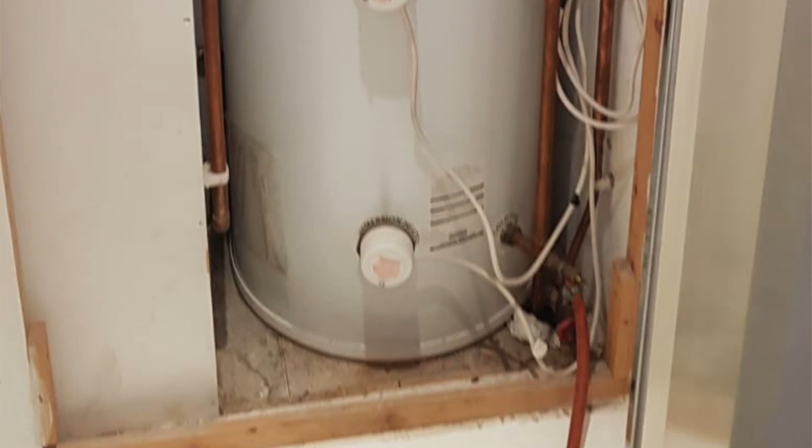Now this is an unvented cylinder, and this is where the white expansion vessel goes, so the potable water one. But this Heatrae Sadia one, this Megaflo, doesn't have one because it has an internal bubble.

So what's basically inside here is like a big wagon wheel, which is connected to the hot water out pipe, which comes down to near where the temperature pressure relief valve is. So because they take the water from down here, it gives a buffer here, and this big wagon wheel goes up and down as the water expands.

So this has an internal expansion vessel. There's another manufacturer that does kind of the same thing for their cylinders. So this doesn't need an expansion vessel on the outside, which is normally connected on either the combination valve here or actually in the cold water supply pipe down into the bottom of the cylinder. That's where the expansion vessel would normally go on here. So that's an unvented cylinder that doesn't require an expansion vessel because it has one built in.

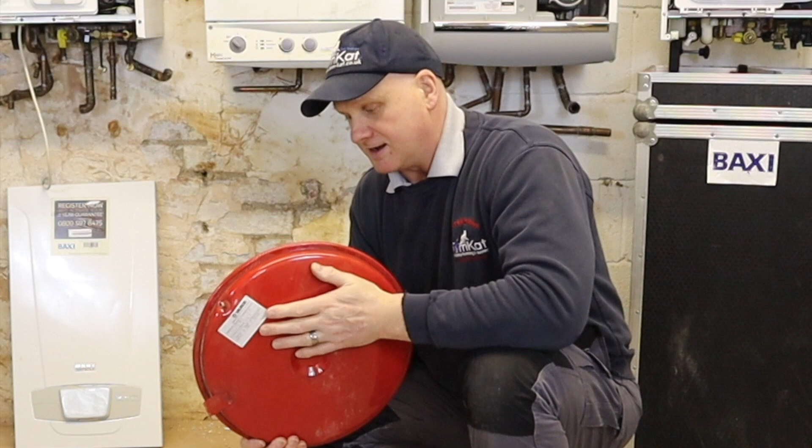Now we've got two different types of expansion vessels here, like I've just been saying. This is a central heating one, which we're going to be cutting up, and this is the hot water one. So I'm going to cut the central heating one up because, as you already know now, the diaphragm is held in with this section here. So this side is the air side and this is the water side. So what I'm going to do is cut a section out of here so we can see what's inside there.

So I've got my angle grinder and I need to put my PPE on. First of all, let's get my specs on. And then I can put my ear defenders on. And I can start shouting again. So, here goes. Remember, when you're using something like this, always follow the safety precautions from the manufacturer. I am actually using a steel cutting blade here, and always remember your PPE.

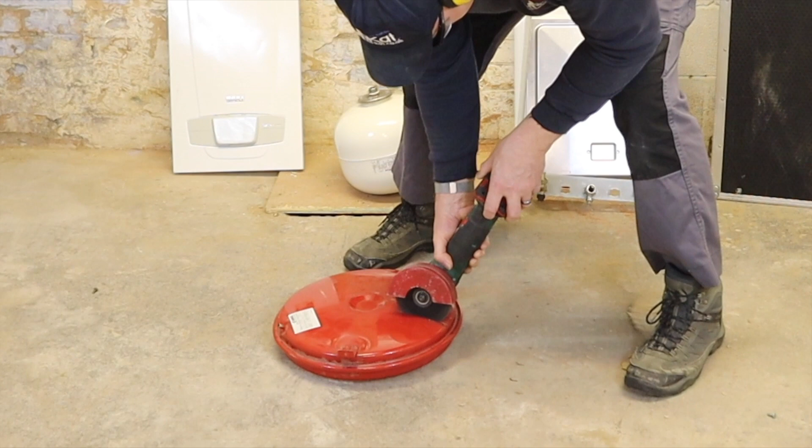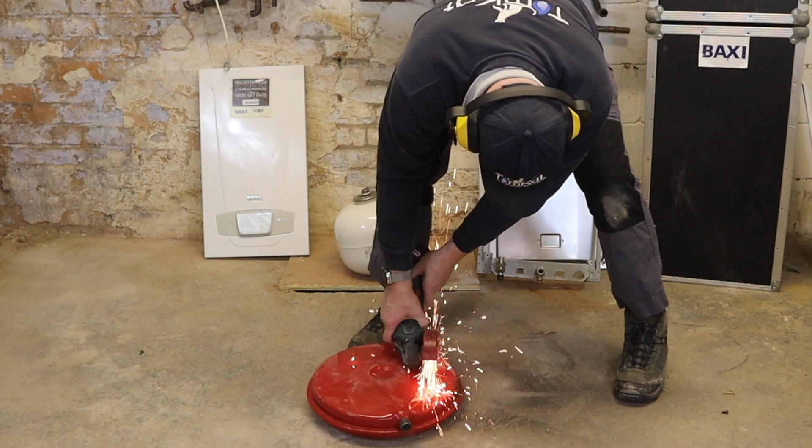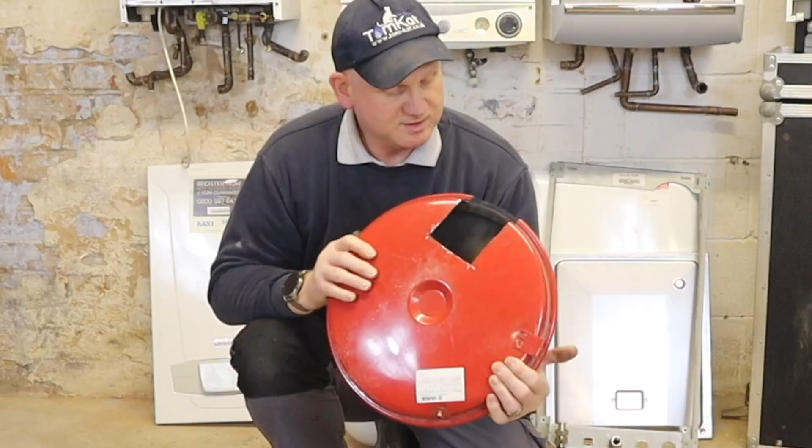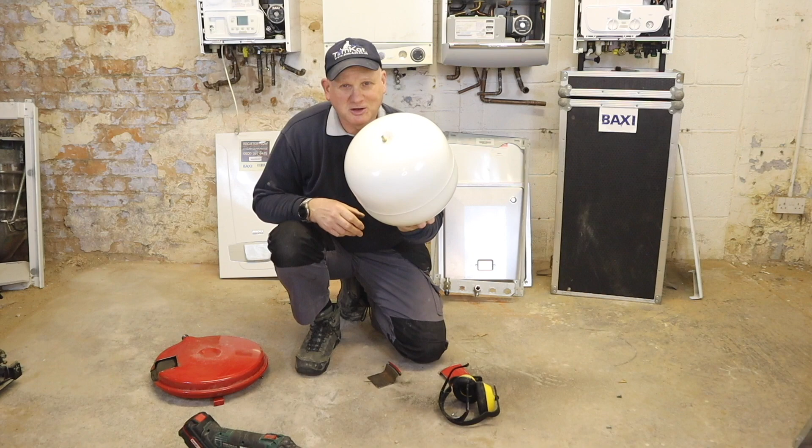That's one side cut. Just need to do the same on the other. Now I can see inside this diaphragm. So that's that one cut open. Let's give this one a go. So I've made a little frame, hopefully it's going to stop it spinning. We'll see.

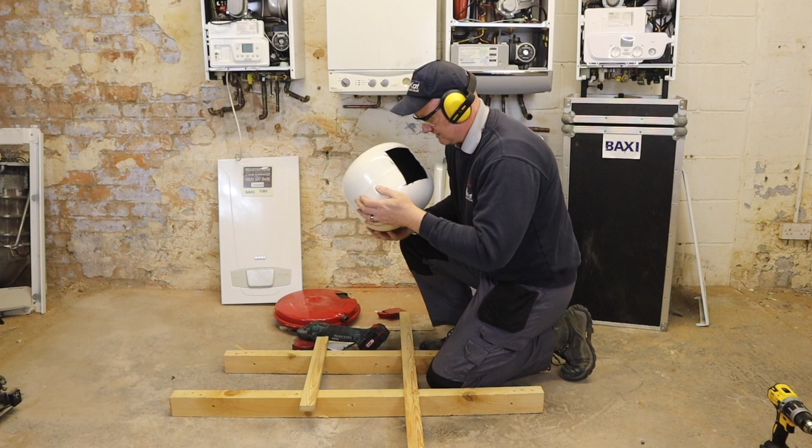That were easy. So now you can see the diaphragm is actually in the bag, like we say, inside there. Let's have a closer look then.

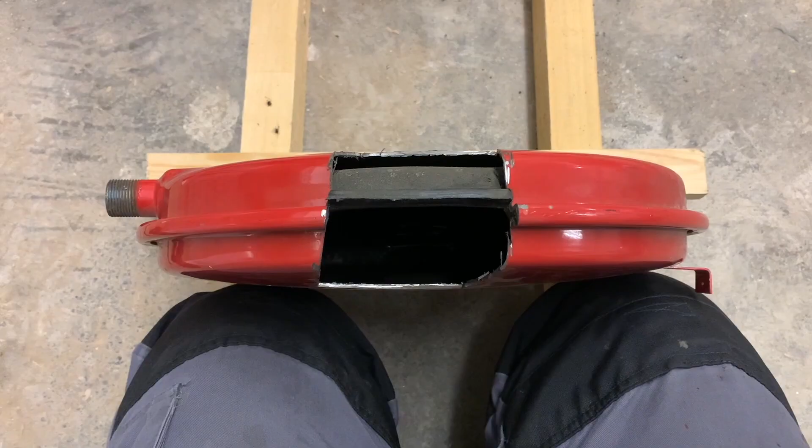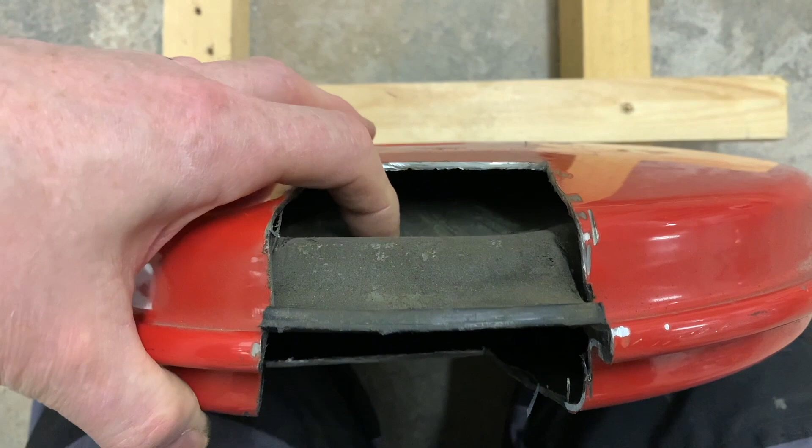Now let's have a look at the central heating one first. So we can see here, this is where the central heating water comes in. And on this back side of the diaphragm here, this is where the water would expand and push against the diaphragm, which would then compress the air, or the nitrogen, on the other side. And if you look closely, can you see that down there? There's actually water in the air side of this expansion vessel. That's why it's here - it actually didn't work. So that's the water side and that's the air side, and you can see that's what the diaphragm would be doing, because you can compress the air but not the water. So that's the central heating one.

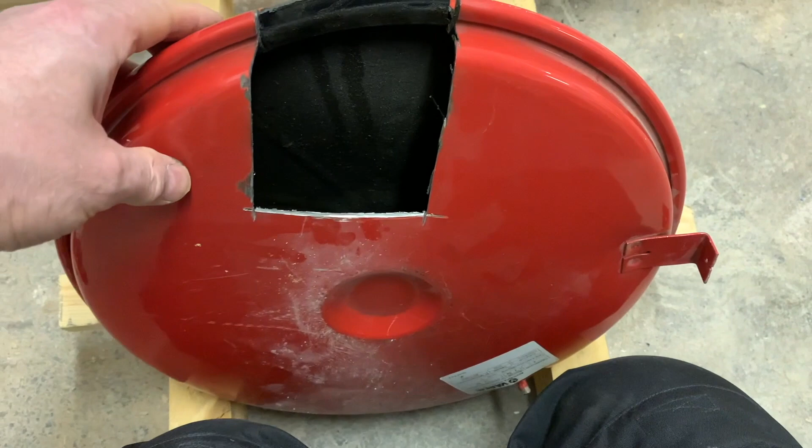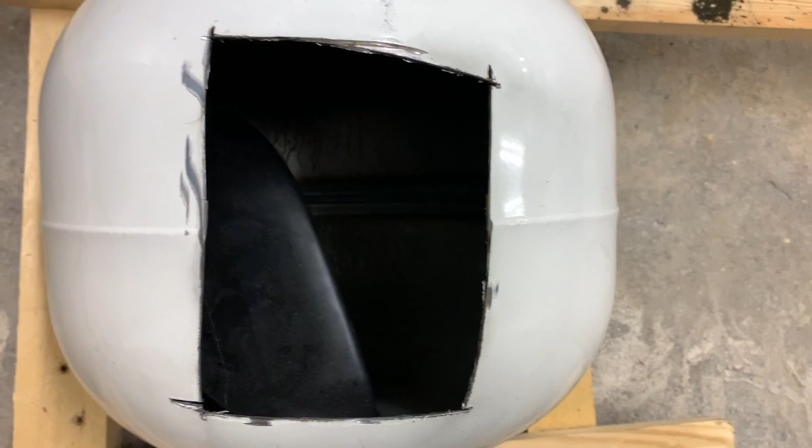Now let's have a look at the potable water expansion vessel. So again, this is where the potable water would go in, so fluid category 1 water would go in there and it would go into the bag. So all the other space around it is taken up by the air, so you can see the Schrader valve there. So you can see the bag keeps the potable water completely separated from the steel vessel. So that's what you'd find inside this potable water expansion vessel.

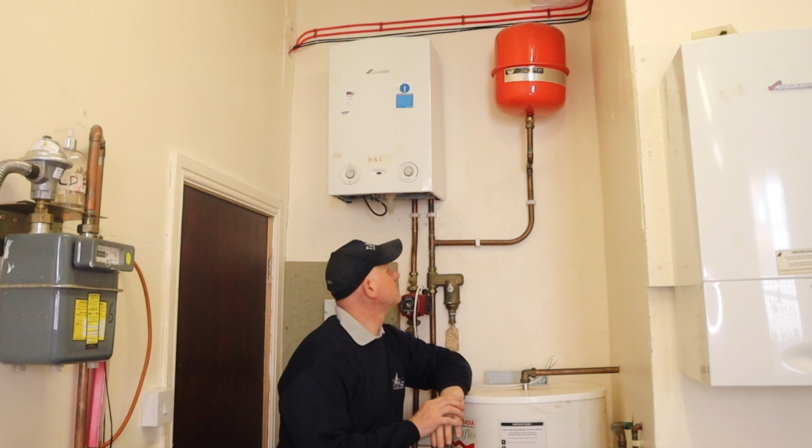So as you can see here, not all the central heating expansion vessels are like big discs. They can also be kind of ball shaped. And this is an external expansion vessel going to a heat only boiler. As you can see, the connection here is on the return, as close as we can to the actual boiler. So if you do have to put a remote expansion vessel on, it should go on the return as close as you can to the boiler.

And the reason why we put it onto the return is so we don't get the excessive heat which we would on the flow. So we would be getting a lot cooler water coming back, which would prolong the life of the diaphragm within this vessel. So that's why they go on the return as close as we can to the boiler. So that's how you would fit an external expansion vessel on a heat only boiler.

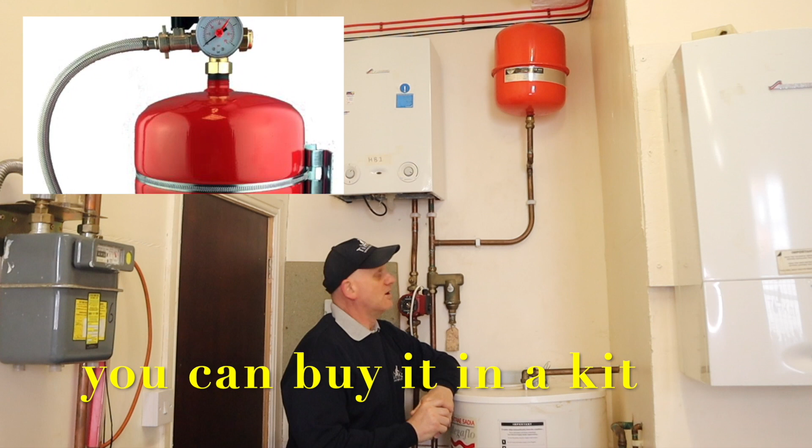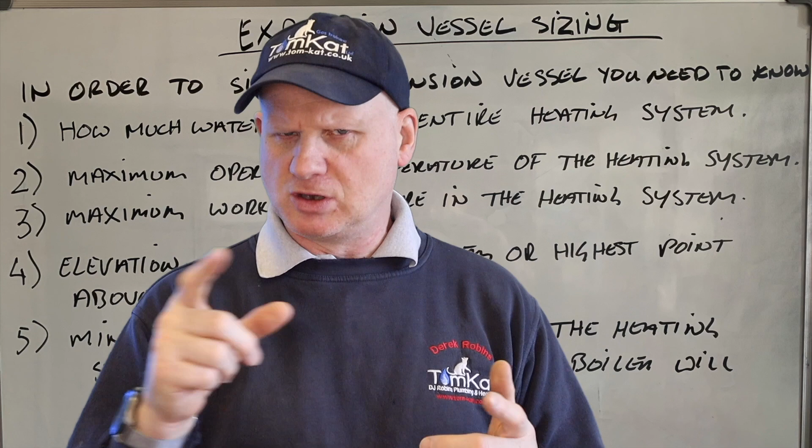Now let's have a look at how we are going to size this expansion vessel for a central heating system. It's pretty much the same way as sizing for potable water, but we'll look at that at the end. So these are the things that we need to do here. In order to size this expansion vessel, we need to know, first of all, how much water is in the entire heating system.

So how are we going to do that then? Well, basically, if you have got a meter on the cold water inlet, you could use the meter to tell you how many litres of water it's taken to fill your heating system. That's one way of doing it. Another way is to find out how much water is held in a radiator, your boiler, your pipework and your fittings. But that could take some time.

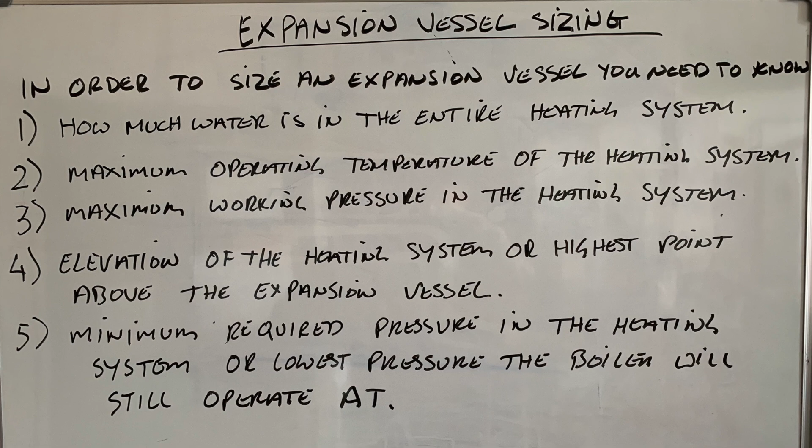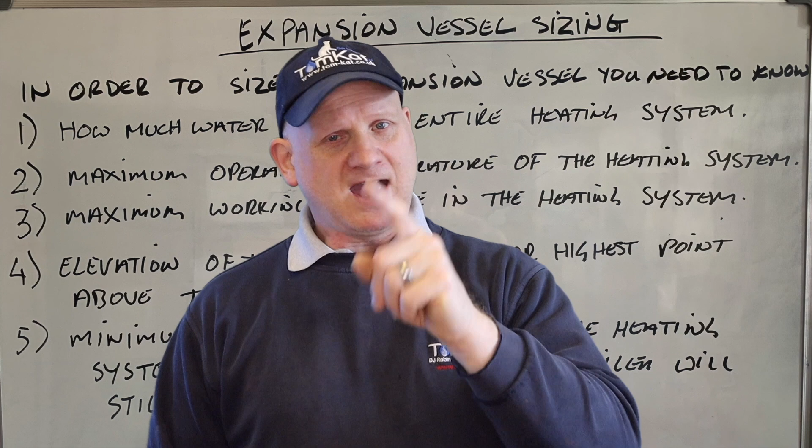What do we need to do next? We need to know our maximum operating temperature of the heating system. So the maximum temperature will be whatever you set the boiler to, whether it's 70, 75, 80, 82, depending on what your boiler is. I would always take the maximum rating of your boiler. So if your boiler can go up to 82 degrees, set it to that as your maximum. If it can go to 75 degrees, then set it to that. That's important because anybody could change those settings once you've left.

What's next? We need to know our maximum working pressure in the heating system. So that's going to be what your safety discharge pipe will blow off at, your pressure relief valve. In a central heating system that is normally set to 3 bar. So 3 bar would be your maximum working pressure.

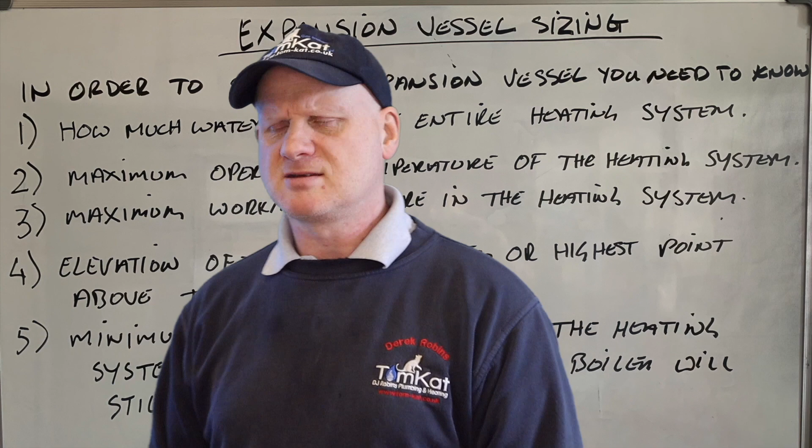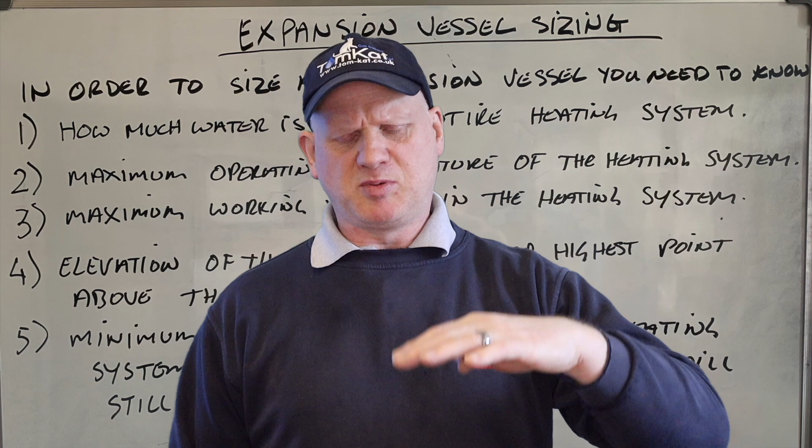What's next? We need to know the elevation of the heating system, or the highest point above the expansion vessel. So what do we mean by that then? Well, basically, if you're going to put your expansion vessel low down on the floor, then from the top of the expansion vessel, you need to measure to your highest point in the heating system. So that would probably be your radiator on your top floor, first floor, second floor, whatever. So that's the distance we need in meters. That's what we mean by that.

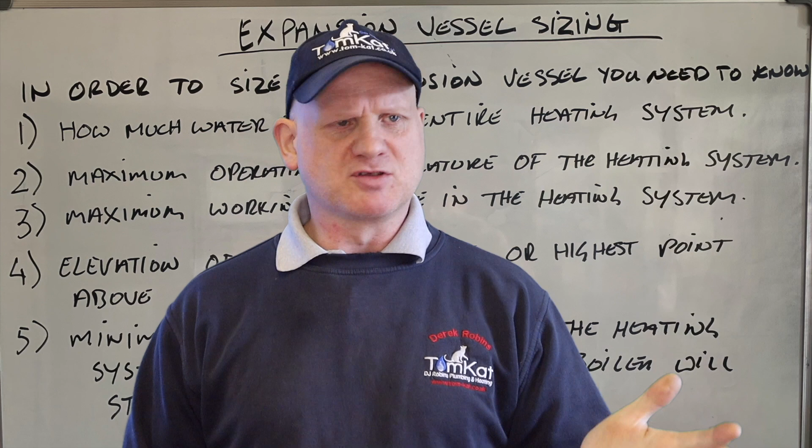What's next? We need to know the minimum requirements of the pressure in the heating system, or the lowest pressure the boiler will still operate at. So this minimum pressure will be the lowest pressure your boiler will still work at, and that could be 0.5 bar, it could be 0.6 bar, I know some don't work at 0.8 bar, so that's what you need to find out - what's your minimum pressure.

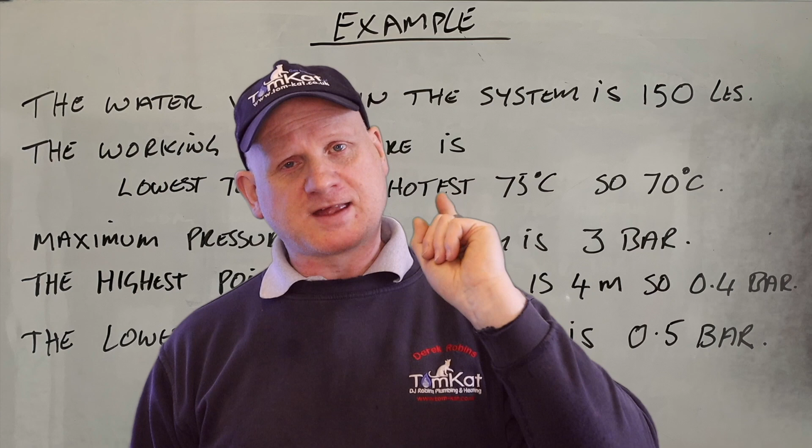So that behind me is what we need to know when we're first sizing this expansion vessel. Now behind me is an example, so hopefully this will make it a lot clearer for you. Let's have a look.

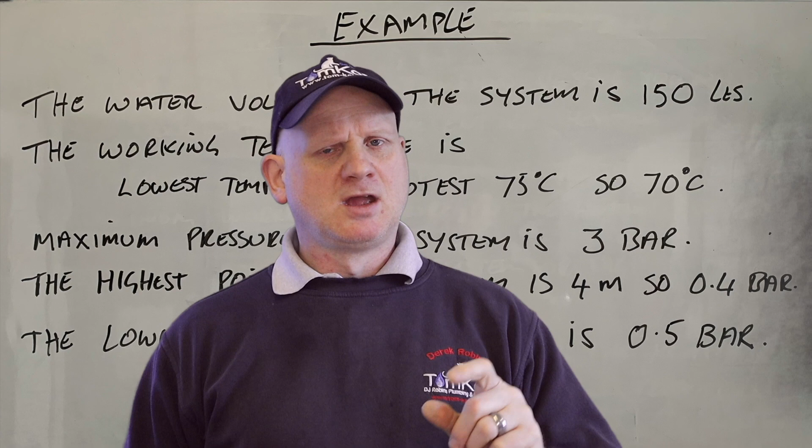So the water volume in this system is 150 litres. The working temperature is 70 degrees C. So how did I work that out? Basically what you've got to do is look at the maximum temperature, look at the lowest temperature the system will ever get to - shouldn't go below 5 degrees because then it'd start to freeze. So your lowest temperature is going to be 5 degrees, and your maximum - you take your lowest from your maximum, and that's what it's going to expand. So that's important as well. That's how I got to 70 degrees even though my maximum temperature was 75. Let's continue.

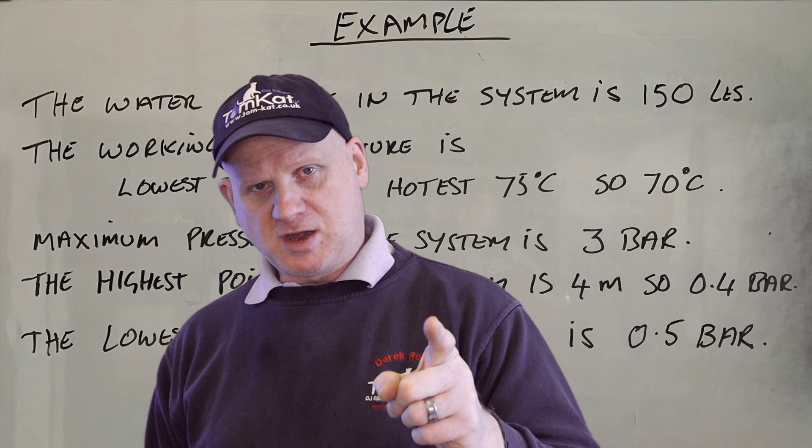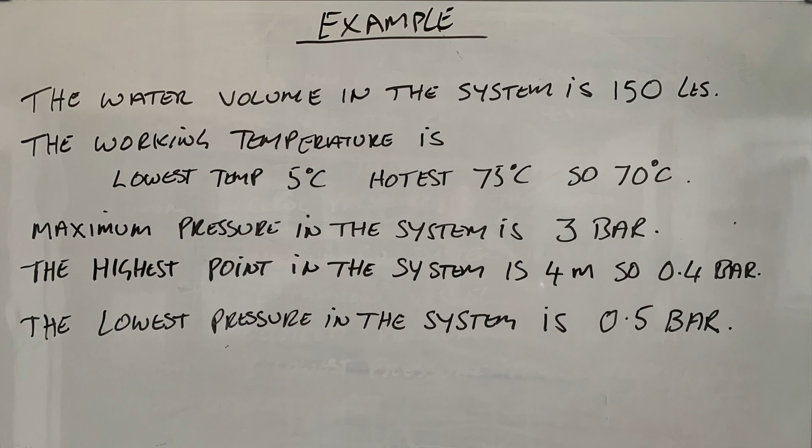The maximum pressure in the system is 3 bar, so it's a 3 bar blow off. The highest point in the system is 4 meters, so 4 meters is equivalent to 0.4 bar, because 10 meters is equal to 1 bar in pressure. That's how we got that then. And finally, the lowest pressure in the system, or the lowest pressure the boiler will actually continue to operate at, is 0.5 bar. So that is our example.

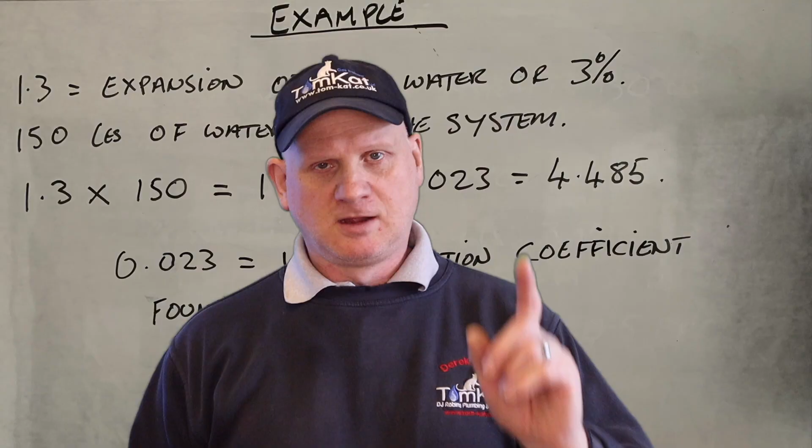So let's find out exactly what size expansion vessel we ended up with. Let's have a look at this working example then.

So first of all, you can see that I've used a figure of 1.3. So what is this figure of 1.3? Well, basically that's what we're allowing for the expansion of the water, 1.3 or 3%, because it's a sealed system, not at sea level and open to atmosphere. So we're going to use 1.3 for 3% of the expansion. And you can see we've got 150 litres. So 1.3 times 150 equals 195. So that's what we're allowing for, 195 litres.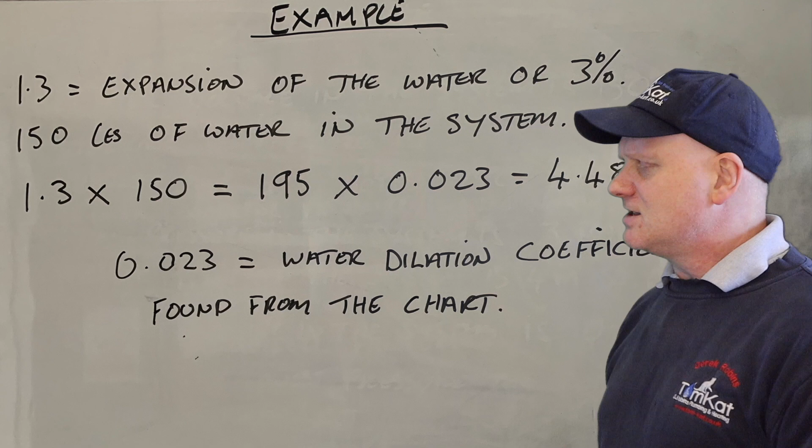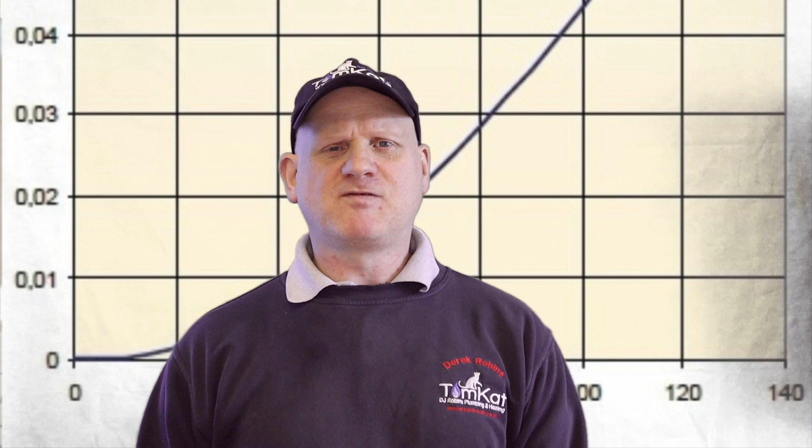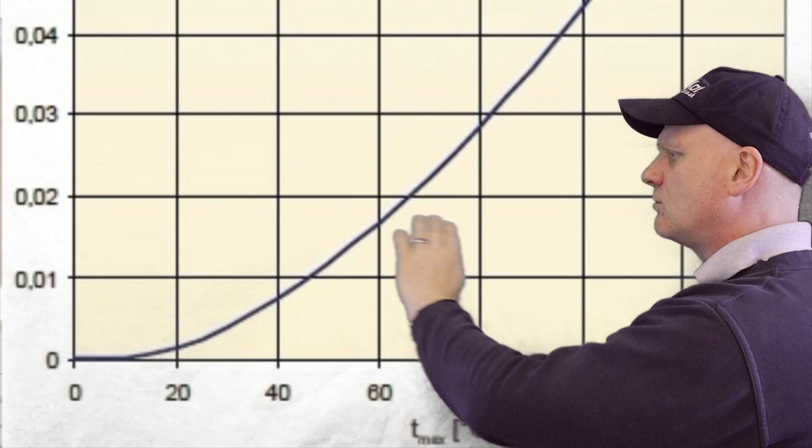Now you can see we're timesing this figure by 0.023. Where's that come from? That's actually the water dilation coefficient, taken from this chart. We have the temperatures along the bottom and the coefficient up the side. So we find our temperature, work our way up, go across, and it gives us our coefficient. That's how we got this figure of 0.023.

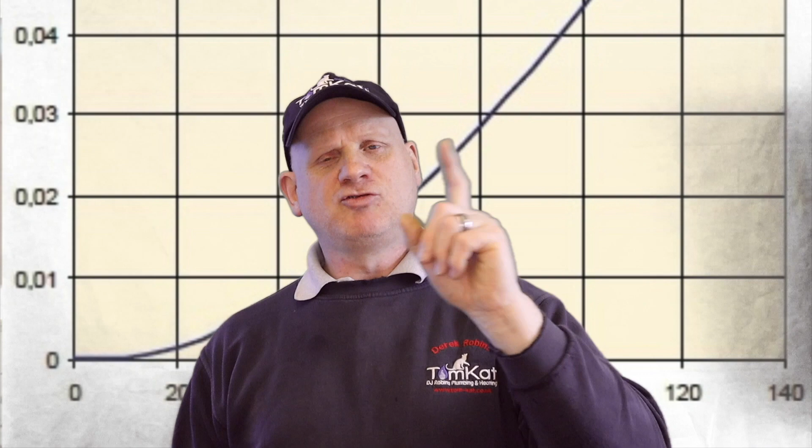We times this 195 by the 0.023, which equals 4.485, as you can see here. So that's the first part done. Did you understand it? Well, hopefully you did.

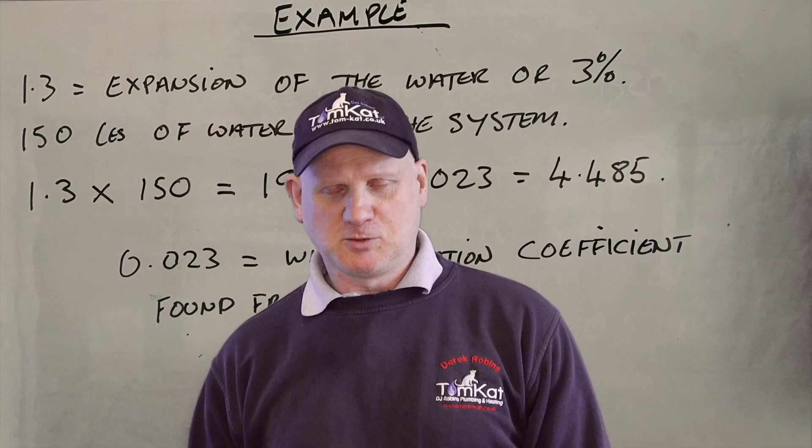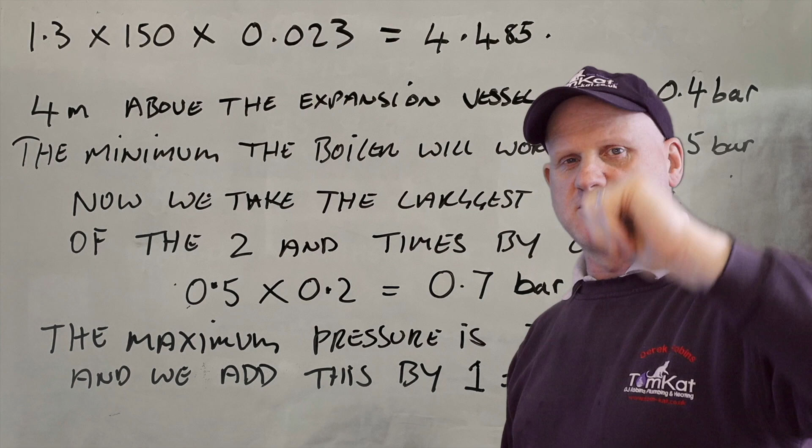Let's move on. Next we need to work out our minimum pressure. From the board here, you can see we are 4 meters from the expansion vessel to the top of the radiator at its highest point. So that's our highest pressure. Because it's 4 meters, we turn that into bar, which is 0.4 bar. So our first reading is 0.4, but the lowest reading in the boiler is 0.5, so we need to take this higher pressure of 0.5 because it's higher than the 0.4.

And we need to times this by 0.2. So 0.5 times 0.2 is 0.7. So that's our highest reading, even though it's taken from the boiler, but the boiler is a higher figure than the highest reading, if that makes sense.

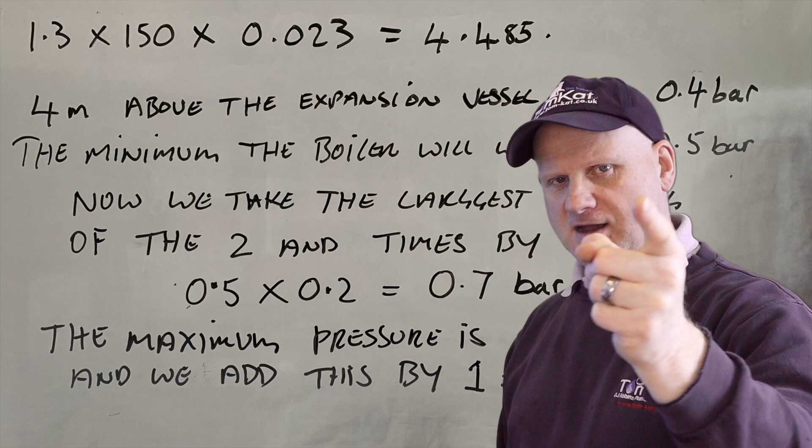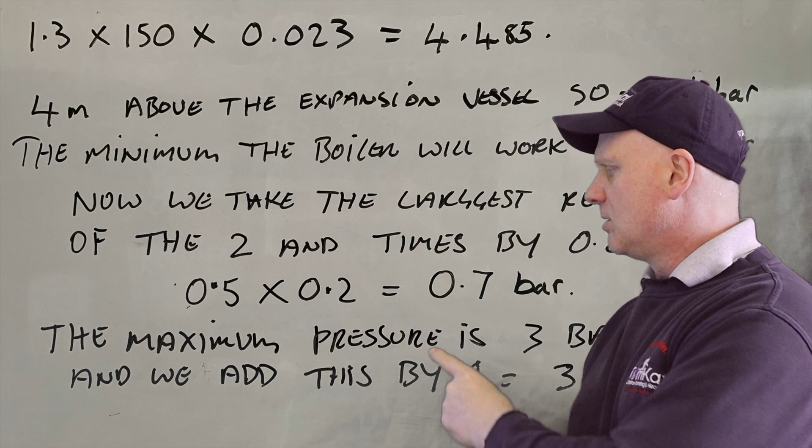Now we also need the maximum pressure. Our maximum pressure is 3 bar, because it's a 3 bar blow off, and we need to add 1 to this, so 3 plus 1 is 4. Didn't even need a calculator for that one. So we've got our minimum pressure of 0.7 and our maximum pressure of 4 bar. That's our next lot of readings.

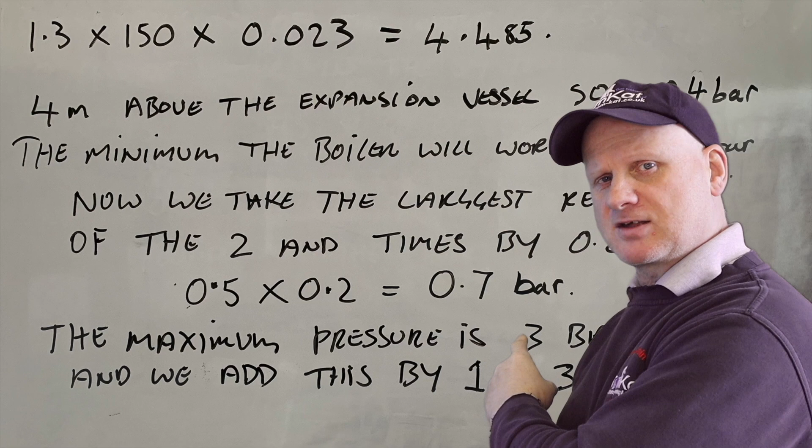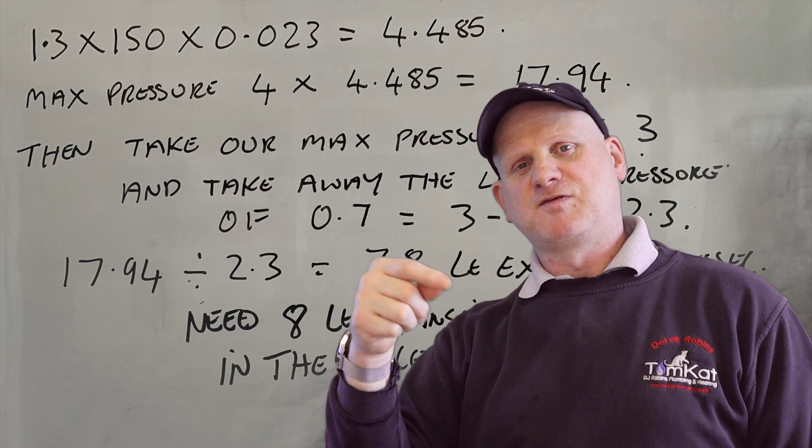Let's continue. Now we have this figure of 4.485, and what we have to do is times this figure by this maximum pressure of 3 plus 1 is 4. So we do 4.485 times 4 equals 17.94. That's the first calculation we need to do.

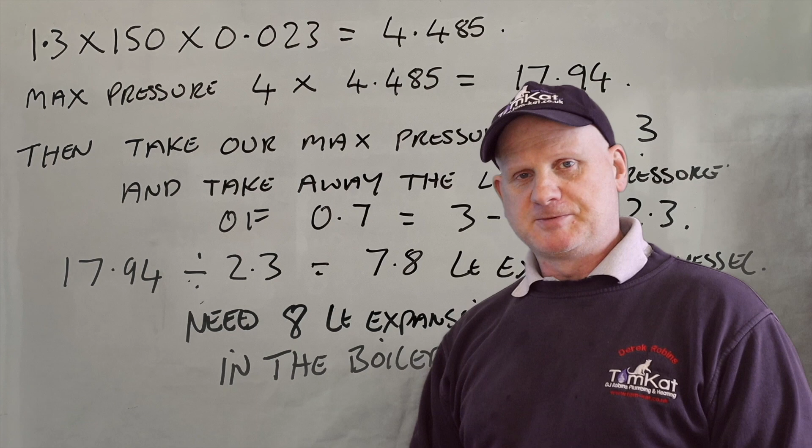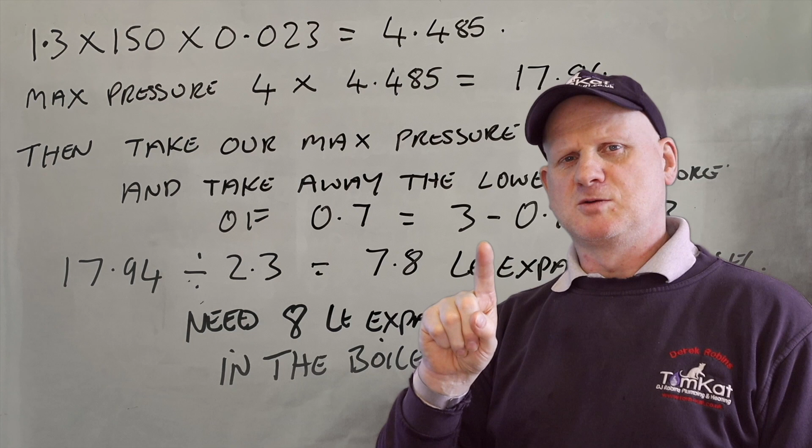Now the next thing we need to do is take our maximum pressure of 3, not the 3 plus 1, just the 3, our blow-off pressure of 3, and we need to minus this 0.7. So that's our next one. 3 minus 0.7 is 2.3.

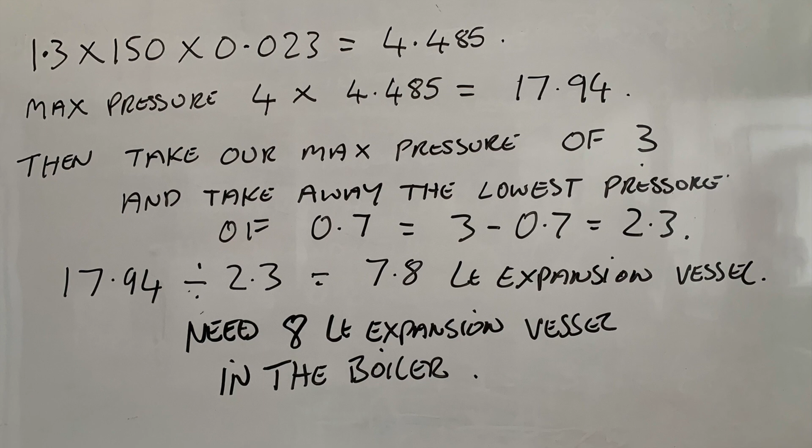Now the last calculation we need to do is 17.94, taken from the top here, divided by this 2.3, which gives us a figure of 7.8 litres. So technically we would require an 8 litre expansion vessel for this system.

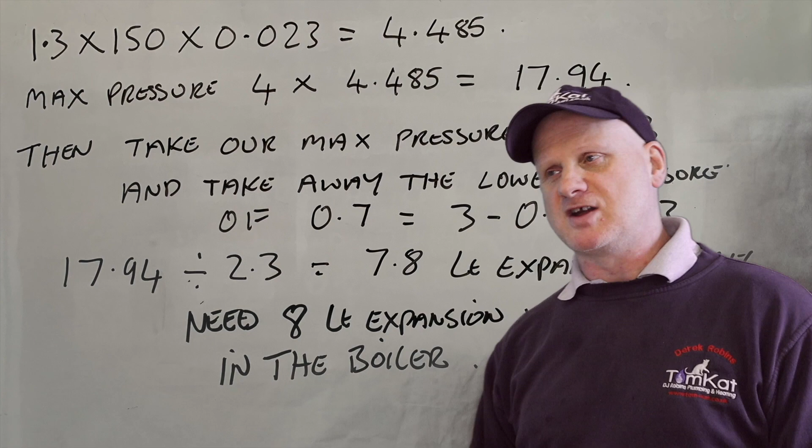So let's just recap what's behind me, so hopefully you understand it. Let's have a look. So we've got the 1.3, which was our percentage, so our 3% for expansion, times by the litres of water, which was 150. I think that came to 195. Then we times that by the coefficient, which is 0.023, which we got from the chart, which came out at 4.485.

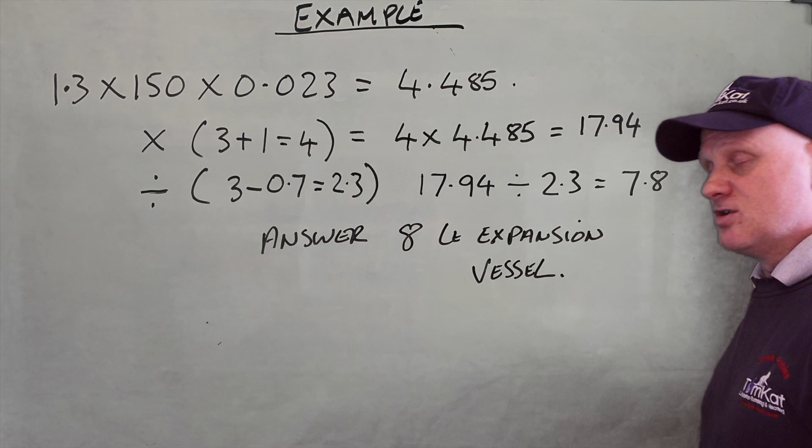We then need to times that figure by our maximum pressure plus 1, which is 4. So we do 4 times 4.485 is 17.94. And then we need to divide that figure by our high pressure and low pressure, which is 3 minus 0.7, which is 2.3. So 17.94 divided by 2.3 is 7.8, which gives us a final answer of an 8 litre expansion vessel.

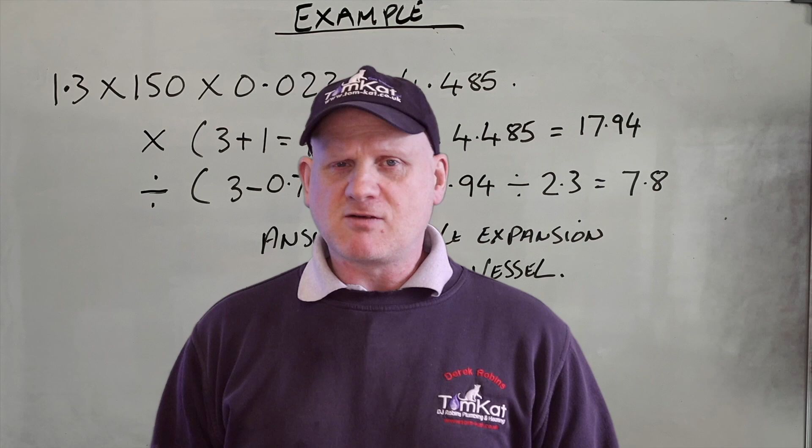So hopefully now you understand how to work out these expansion vessels. That's working out the size of the vessel. Now let's have a look at how we set the pressure in this vessel.

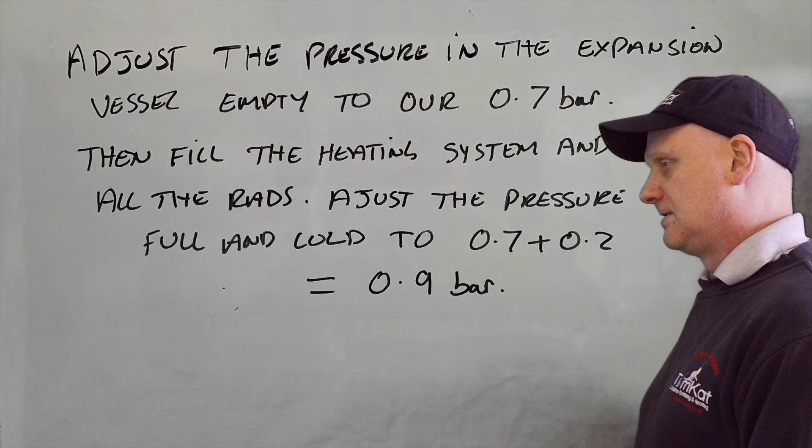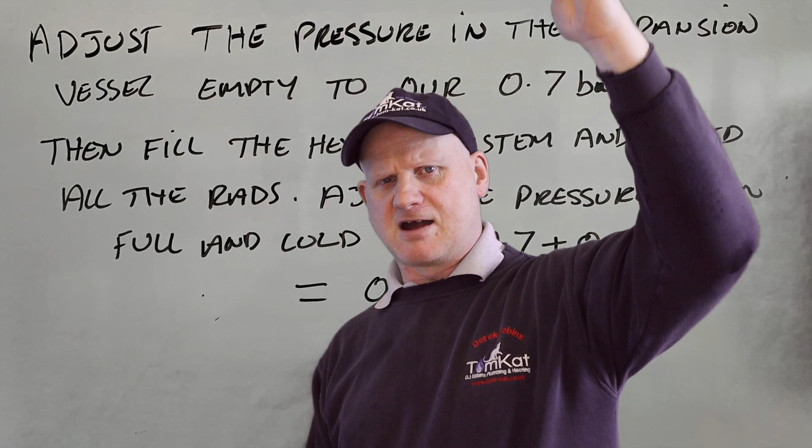Now this is the pressure we're going to adjust our expansion vessel to here. We need to adjust the pressure in the expansion vessel, empty, to our 0.7 bar. Remember, that's what we worked out was the minimum pressure the boiler could have plus this 0.2 because it was greater than our head pressure, but obviously if our head pressure is more, then we would be using that one.

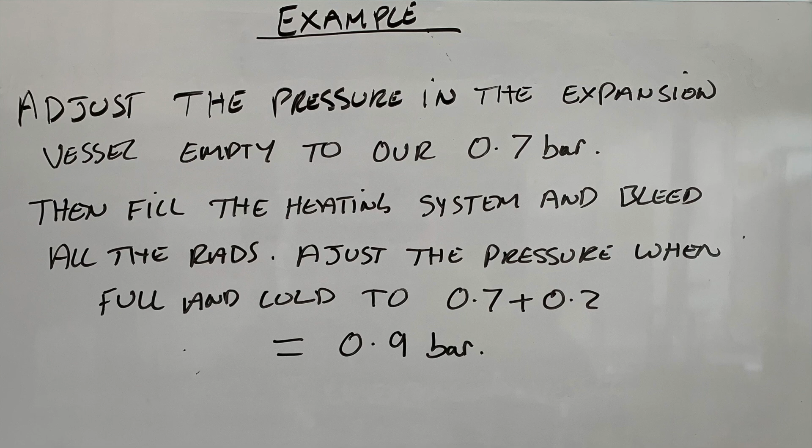Then we need to fill the heating system and bleed all the radiators, and adjust the pressure when full and cold to 0.7 plus 0.2. So that equals 0.9 bar. That's what we're going to be filling this system to, with the pressure in the expansion vessel.

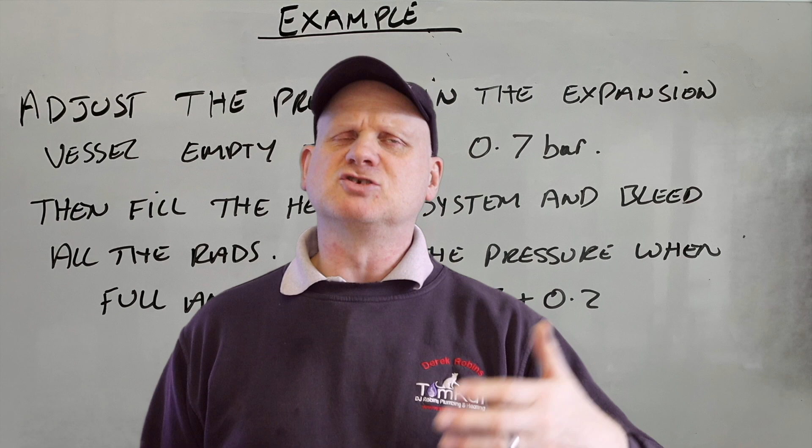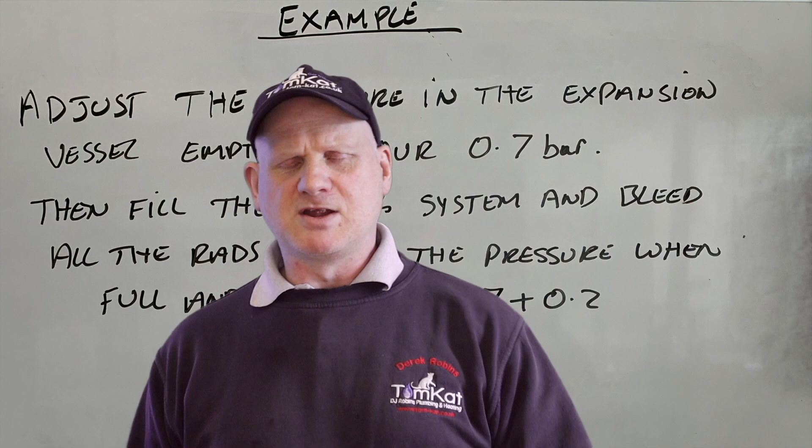Now a lot of boilers come out with their expansion vessels already preset to between 0.7 and 1 bar. Depending on the size of the boiler you've bought will depend on the size of the expansion vessel and what pressure they put in there. But remember, you can't have an expansion vessel with a greater pressure than what the system is going to go to, because otherwise the diaphragm won't move. So if you've got 3 bar in your expansion vessel and you only need it to go to 1 bar, it's not going to transfer, is it?

So now as promised, let's have a look at how we're going to size the hot water expansion vessels. This is what we need to do here.

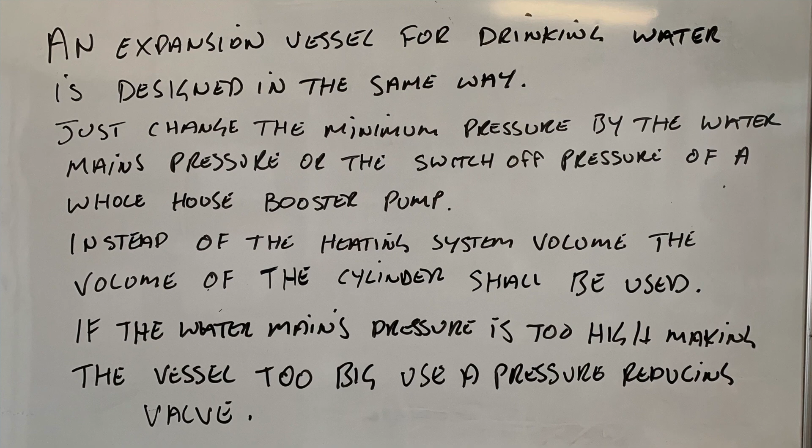The expansion vessel for drinking water is designed in the same way as the central heating one. Just change the minimum pressure by the water mains pressure or the switch-off pressure of a whole house booster pump. Instead of the heating system volume, the volume of the cylinder shall be used, and if the water mains pressure is too high, making the vessel too big, then use a pressure reducing valve. That's why most unvented cylinders now have pressure reducing valves, which reduce the pressure to 3 bar, because if the pressure is too big coming into the vessel, it's going to need a massive expansion vessel, or the cylinder might need to be really thick to take the pressure. So that's how we're sizing a hot water expansion vessel.

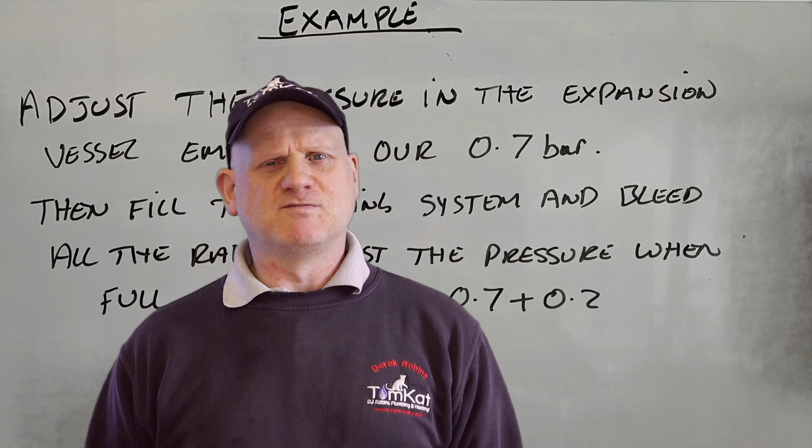Let's have a look now at how we're going to test the pressure in these expansion vessels. Let's get downstairs and do that.

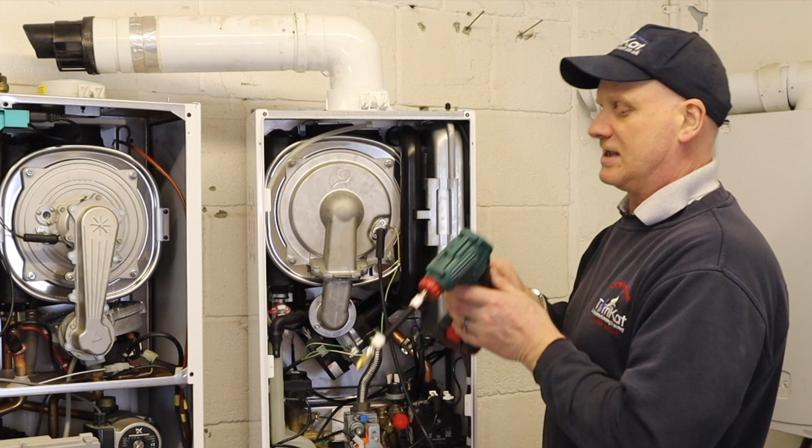The boiler we're going to check the expansion vessel in is this 600, because it's the easiest one out of this lot to do, basically because it's on top here, easiest for me to show. I haven't got a clue if there's any air, nitrogen or whatever's in this, so first let's find out. It's 0 on my gauge, on my little pump.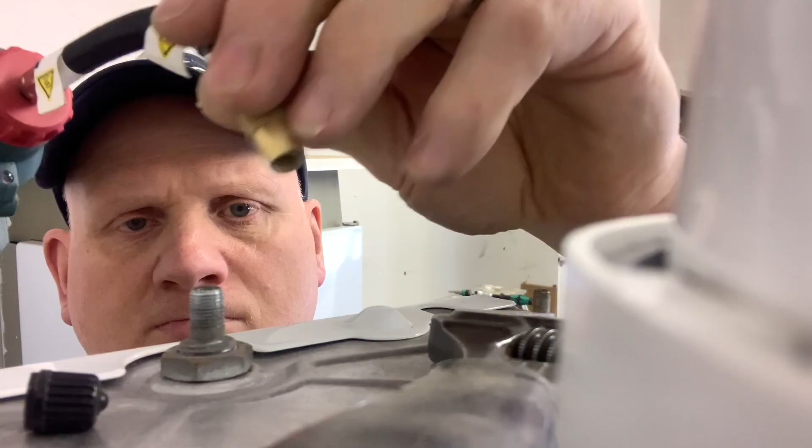So let's connect it on. I couldn't hear anything come out, and according to my pump there is 0. There's nothing in this expansion vessel.

Okay, so when we need to pump it up, what we need to do is, because when your system's drained, this is when you'll be checking this and setting it to your, or in our situation, 0.7. That's how we would be doing that.

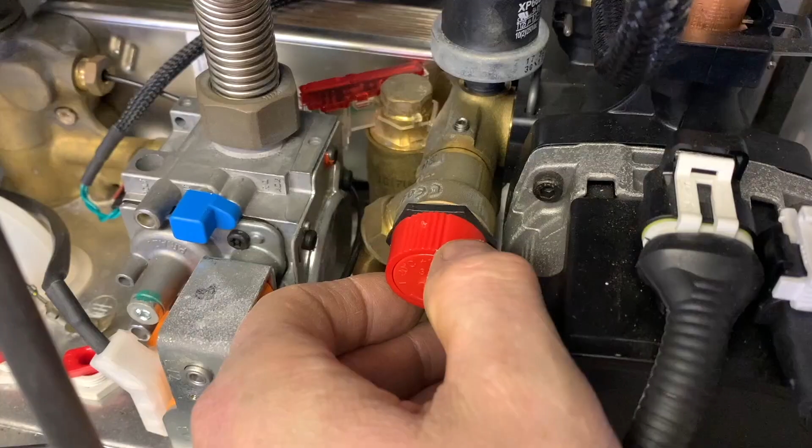Now there's no water or anything in this, but if you're checking them when you've isolated the boiler, you drain out the water because you can't check the expansion vessel with water in it, and then you open the pressure relief valve and keep that open while you're putting the air in. So that's the difference between when there's water in the system and when there's no water.

So right at the very beginning, this is how we'll be checking it. We don't have to hold anything open. We just need to fill it to 0.7 of a bar. So there we go, we've got 0.7 of a bar in our expansion vessel.

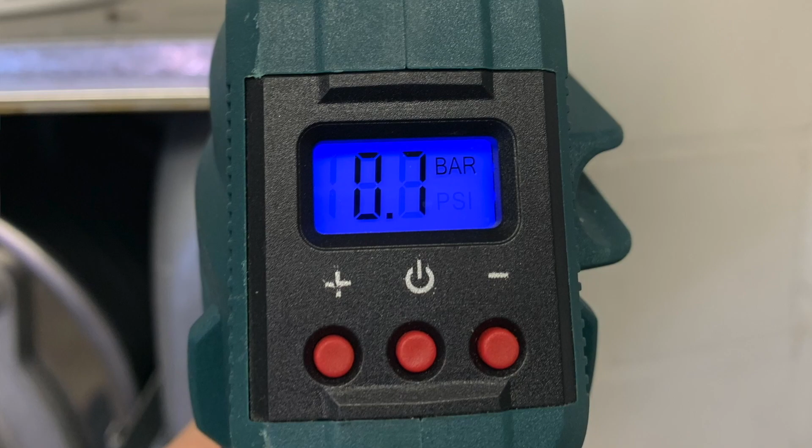So let's put our 0.7 in that expansion vessel. We would then fill our system, okay, and then we would check it. But we need 0.7 plus 0.2, so it would be 0.9 then. So we will be putting 0.9 of a bar in. Let's put 0.9 in.

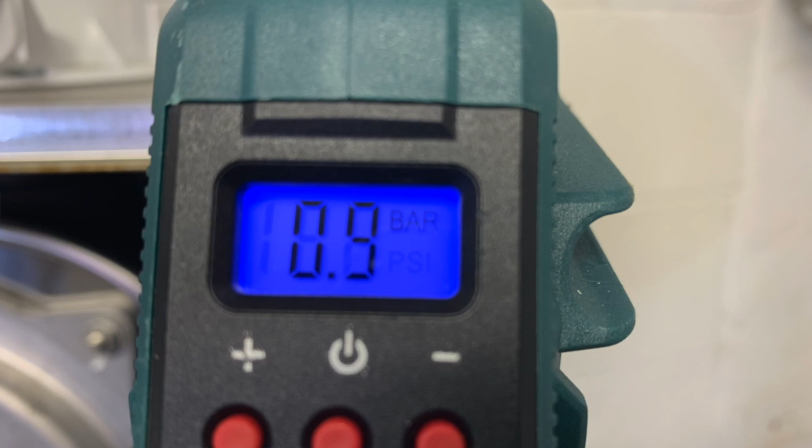And that's our preset at 0.9 in our system when it's cold. So we've checked and set our expansion vessel. It's as simple as that.

Does anybody ever check their expansion vessel before they fill them up or after they fill them up? I don't think so, we just rely on the manufacturer. And I know Baxi send theirs out at a bar. They also say in their manufacturer's instructions how many litres of water you can fill the system to.

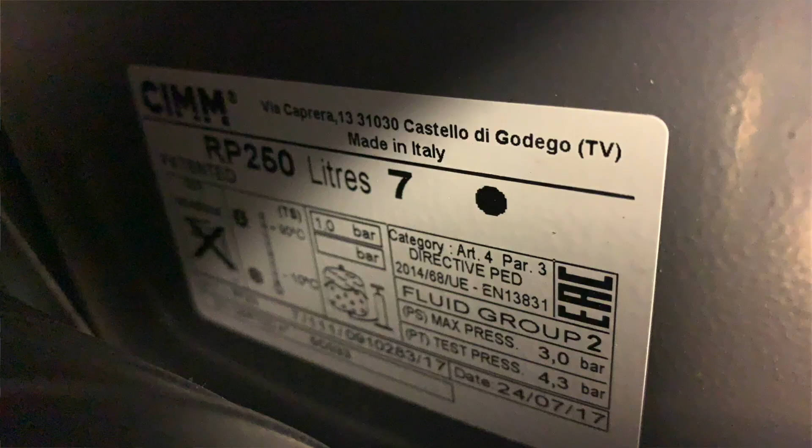Because what size is it? It's an expansion vessel, it's a 7 litre, so this has got 7 litres in there. So if this had 150 litres of water in there, it won't be big enough, would it? Because we'd need an 8 litre expansion vessel.

So you can see the expansion vessels are set for what they expect the systems to be on. Even though this is, I think it's a 24 kilowatt. No, it's a 30, it's 30 kilowatts, a 630. So this is a 30 kilowatt, but they expect the heating system to be incredibly low because they've only given you a 7 litre expansion vessel.

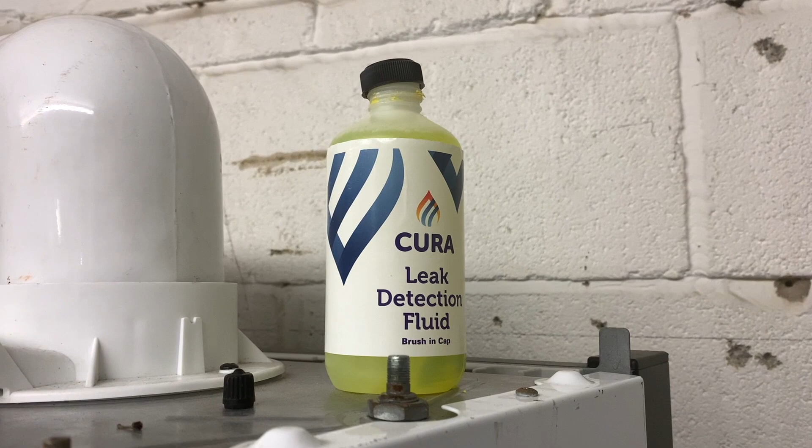So that's how we fill the expansion vessels up. And once you've disconnected your pump, always check the Schrader valve with leak detection fluid to make sure it's not leaking before you put your cap back on.

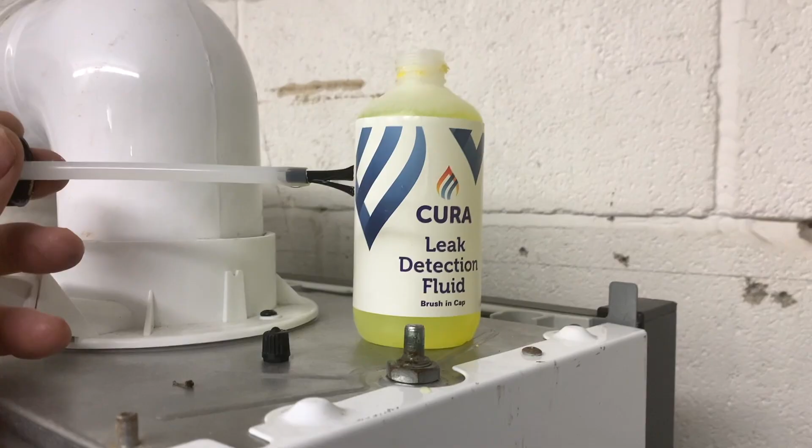Now, if this unvented cylinder did have an external expansion vessel, what pressure would we set it to? Well, basically, we'd set it to the same pressure as our pressure reducing valve. So this is our pressure reducing valve, or our combination valve, and this is set to 3 bar. So when our system is completely drained, we would set our expansion vessel pressure to 3 bar.

And remember, when you're setting the expansion vessel pressure, you can't have it connected to the system, you would have to disconnect it. So whether you're servicing or installing, if you're checking the pressure in these unvented cylinder expansion vessels, make sure it's disconnected completely, so it gives you a more accurate measurement.

Now let's finish off with talking about things that can actually go wrong with these expansion vessels. First of all, you press that Schrader valve in and water comes out and not air, then your diaphragm's gone and water is transferred over to the other side and it needs replacing.

If you press the Schrader valve down and just no air comes out, nothing, then there's a possibility that it's just lost its air through the Schrader valve and it could just need either topping up or the Schrader valve replacing. Remember, if you want to check whether it's leaking, you can use leak detection fluid, and they're dead easy to change as well. You just need a little extraction tool which you can buy from a bike shop, because remember, it's the same thing as what's on your bicycle tyre.